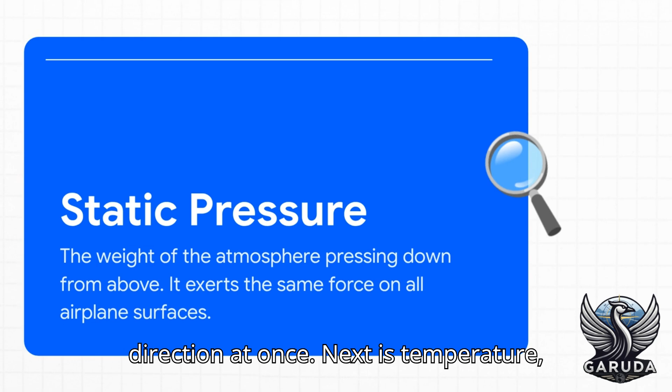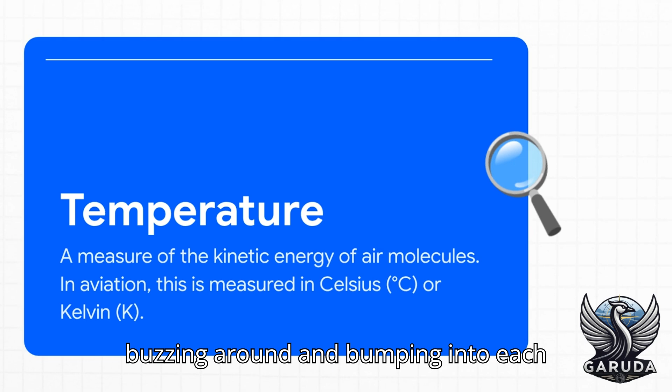Next is temperature, and it's way more than just hot or cold. In physics, temperature is a direct measurement of the energy of all those little air molecules. The faster they're buzzing around and bumping into each other, the higher the temperature. It's all about that energy.

And finally, we have density. The easiest way to think about this is just how crowded the air is with molecules. Are they packed in there shoulder to shoulder, or are they really spread out? And for a pilot, this one is probably the most important property of all when it comes to generating lift.

Now, here's the kicker. These three things, pressure, temperature, and density, they aren't independent. They are all tied together in a relationship we call the ideal gas law. All you need to know is that density goes up when pressure goes up, but it goes down when temperature goes up. For a pilot, this isn't some textbook theory. It means a hot summer day or a high-altitude airport directly and immediately impacts how that plane is going to perform.

Okay, so we've got our big three properties. Now let's see what happens to them as an airplane actually climbs up through this atmospheric ocean. As you climb, pressure and temperature do very different things. The pressure just drops off in this nice, smooth, predictable curve. It makes sense, right? There's just less air above you pushing down.

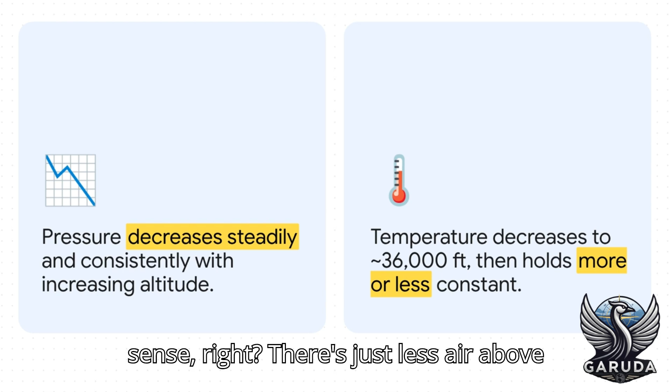But temperature is weird. It gets colder and colder, sure, but only up to around 36,000 feet. Then, as you enter the stratosphere, it just stops. It holds steady for a while, which is kind of surprising.

So this sets up a kind of battle. The colder temperatures are trying to make the air denser, right? But the falling pressure is trying to make it thinner. So who wins? Well, it's not even a fair fight. The drop in pressure is so massive that it completely overpowers the cooling effect. The pressure drop always wins.

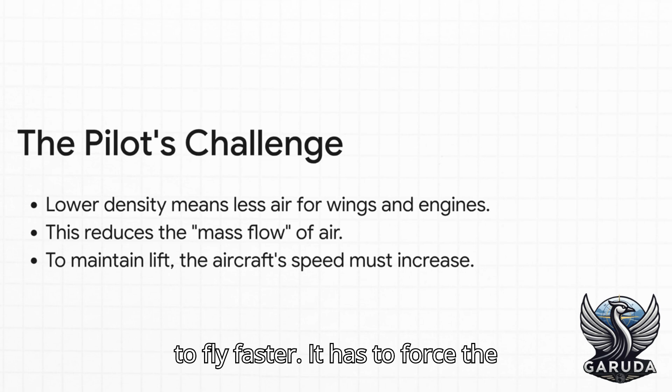And that creates the #1 challenge for flying at high altitudes. Lower density means fewer air molecules for the wings to grab onto, and fewer molecules for the engines to breathe. So to generate the exact same amount of lift, the plane has to fly faster. It has to force the same mass of air over its wings every second.

So this brings us to a huge problem. The real atmosphere is messy. It's chaotic. It's different every single day in every single place on Earth. For aviation to even work safely, we needed a reliable map of this invisible world.

I mean, that's the core problem, isn't it? If the air over Texas today is totally different from the air over Siberia tomorrow, how on earth can you design a plane that performs predictably? How can a pilot in one country and an air traffic controller in another be sure their instruments are telling them the same story? The solution is just brilliant.

It's called the International Standard Atmosphere, or ISA. Now listen carefully. It is not the real atmosphere. It's a universally agreed upon, totally idealized model that everyone in aviation uses as a common ruler, a fixed benchmark.

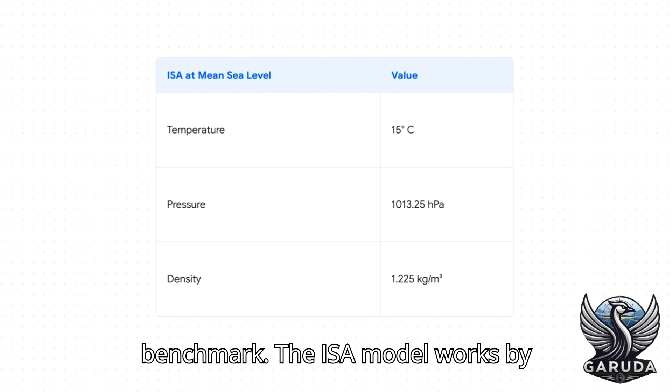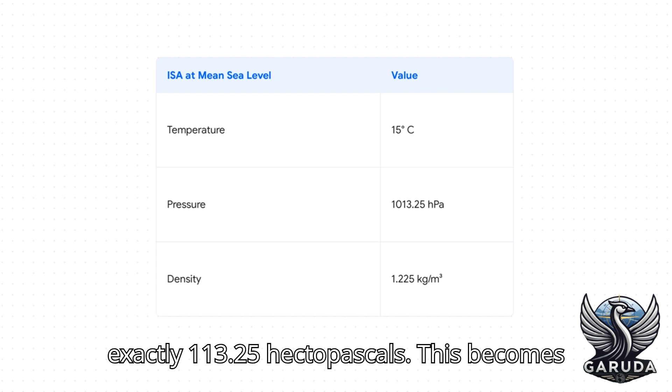The ISA model works by creating a universal starting line. It defines the exact values for a standard day at mean sea level. On this perfect imaginary day, the temperature is a mild 15 degrees Celsius and the pressure is exactly 1013.25 hectopascals. This becomes ground zero for all of aviation.

And it doesn't stop there. The ISA model also defines a standard lapse rate. That's the exact rate the temperature is supposed to decrease as you climb. It's set at 1.98 degrees Celsius for every 1,000 feet, all the way up until it hits that flatline point we saw earlier.

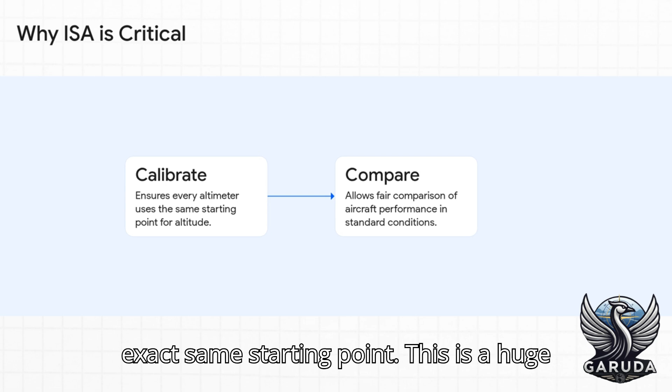So why? Why is this imaginary perfect atmosphere so incredibly critical for every single real-world flight that takes off? Well, it does two absolutely vital things. First, calibration. It makes sure every altimeter in every airplane is using the exact same starting point. This is a huge deal for safety, so when a pilot says they're at 30,000 feet, everyone knows precisely what that means.

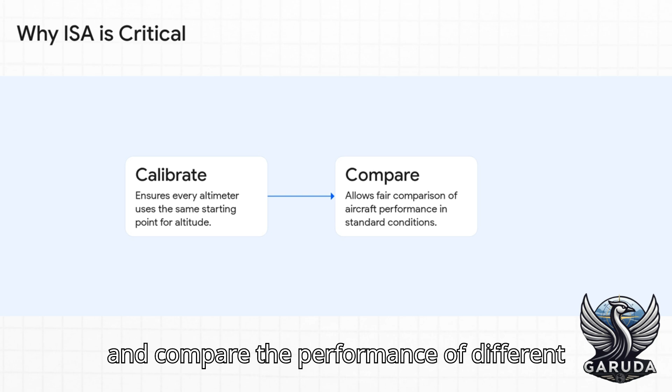And second, comparison. It lets engineers fairly test and compare the performance of different planes. Without it, you'd never know if one plane was actually better or if it just got lucky and flew on a day with denser air.

So when a pilot sets their altimeter to this standard, they're setting that baseline pressure. In most of the world, that magic number is 1013.25 hectopascals. But if you're flying in North America, you'll hear a different number. You'll hear about 30 inches of mercury, or to be precise, 29.92. Don't worry, it's the exact same standard pressure, just measured with a different yardstick.

And that right there, that's the whole ball game. The ISA was never meant to be the real atmosphere. It's the perfect, unchanging ruler that allows everyone in aviation to measure, navigate, and communicate clearly inside the chaotic, ever-changing, real atmosphere.

And that leaves us with a pretty cool final thought. We've just seen how a completely invisible, made-up standard is absolutely essential for us to safely navigate our physical world. It kind of makes you wonder, what other invisible standards are out there, quietly holding our complex world together?